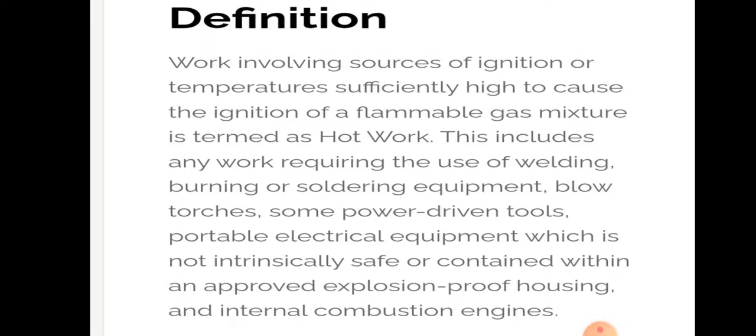This includes any work requiring use of welding, burning or soldering equipment, blow torches, some power driven tools, portable electrical equipment which is not intrinsically safe or contained within an approved explosion proof housing, and an internal combustion engine.

Hot work permit means it is a document issued by a responsible person permitting specific hot work to be done during a particular time interval in a defined area.

SMS should include adequate guidance on the control of hot work and should be robust for compliance to deliver the expectations of ISM code and confirm that it is effective, that stated procedures are being followed.

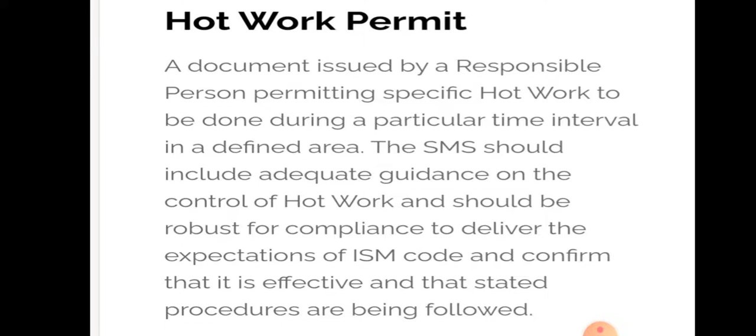Responsibility matter mainly for the master. The master must satisfy himself that hot work is justifiable before granting permission for hot work to be carried out on the ship. It is the master's responsibility to ensure that established procedures for all hot work are implemented and comply fully with company requirements.

If in port, local port or terminal approval is obtained in writing prior to carrying out any work. All flag state regulations are considered.

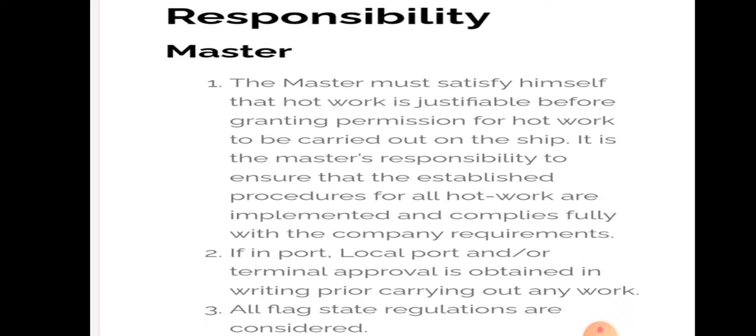You have to ensure that all flag states are considered by doing the hot work permit. Conduct a safety briefing to ensure that control measures are in place, understood, and complied with to the fullest extent.

Prepare a risk assessment with the heads of department to ensure that the environment on board is sufficiently safe for hot work and identify any conflicting operations carried out simultaneously.

Issue the work permit just prior to commencing the work, monitor that all safety controls are maintained throughout, and cancel the permit if conditions are breached or advised by the responsible officer.

The head of department, here the chief officer or chief engineer, should inspect the work area and equipment to be used for hot work together with the persons carrying out the job.

Inspecting the work area and equipment to be used for hot work together with the persons carrying out the job, and physically checking and filling of the work permit jointly with the responsible officer and the person involved in the work.

Testing the atmosphere of the work area where applicable, and ensuring continuous effective ventilation of the work area.

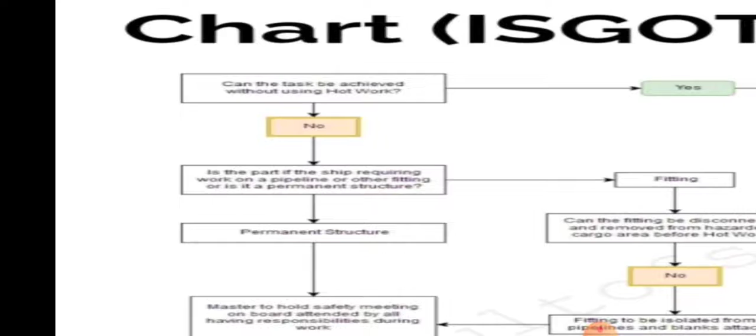Hot work flow chart: here we can say hot work is not permitted if the task can be achieved without using hot work. If yes, hot work is not permitted.

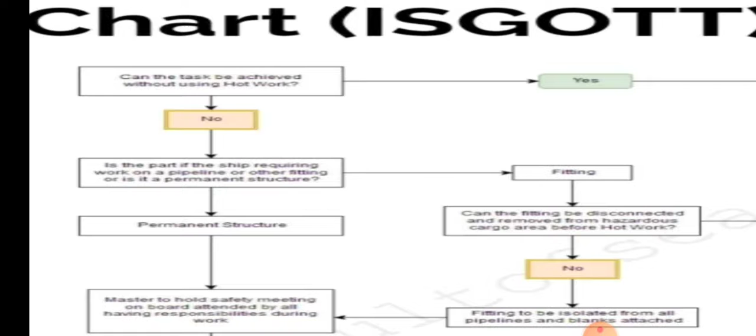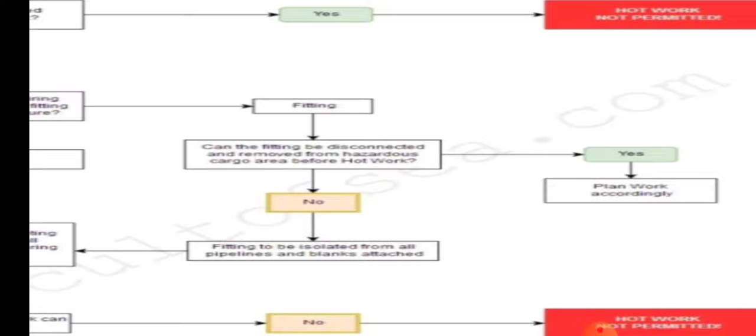If no, we check whether the part of the ship requiring work on the pipeline or fitting is a permanent structure. If it is a fitting, can the fitting be disconnected and removed from the hazardous cargo area before hot work? If yes, plan work accordingly. If no, the fitting is to be isolated from all pipelines and blanks attached.

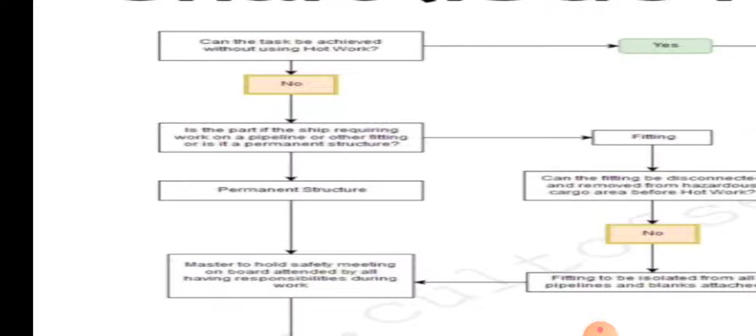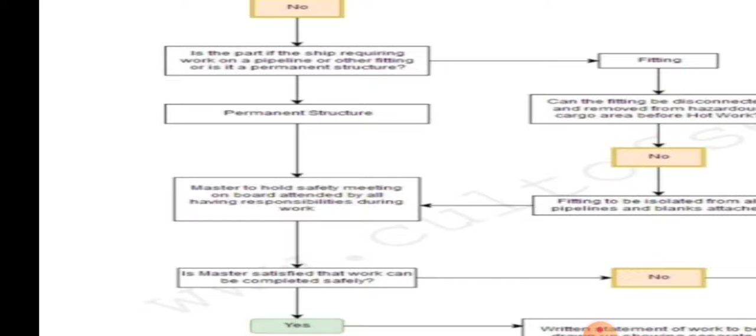If the part of the ship requiring work is a permanent structure, the master must hold a safety meeting on board attended by all having responsibility during the work, and determine whether the work can be completed safely. If no, the hot work permit will not be issued.

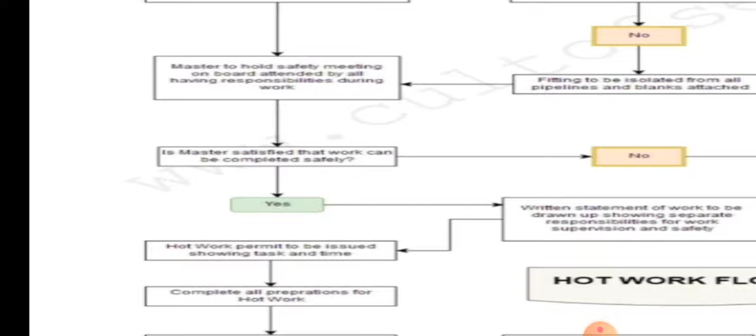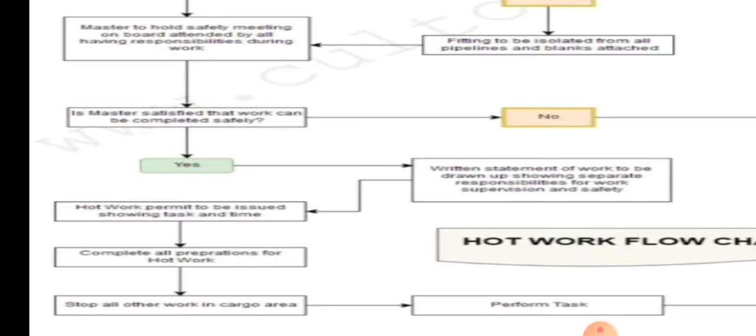If yes, a written statement of work is to be drawn up showing separate responsibility for work, supervision, and safety. The hot work permit is to be issued showing task and time, completion of all preparation for hot work, stopping all other work in the cargo area, performing the task, and recording completion of the operation.

This is how the hot work flow chart works as per ISGOTT.

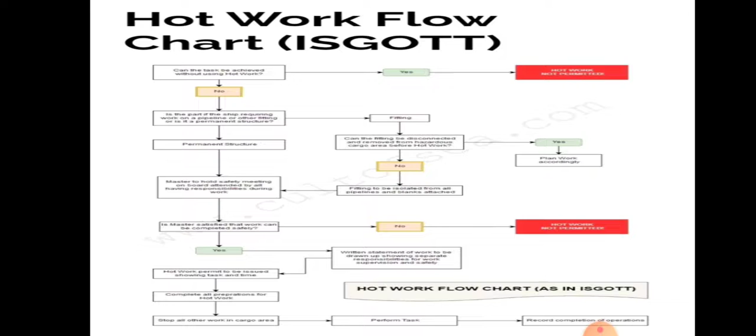Controlling hot work inside a designated space: a designated space for hot work on board is allocated where it is safe to carry out such operations. A permit is not required to be issued, however.

The duty officer on the bridge shall be informed before the start of hot work inside the designated space. Usually, the engine room workshop is considered the designated space.

Hot work outside the designated space means we must prevent unauthorized hot work outside the designated hot work area. Welding extension cables and portable welding machines will be controlled items kept under lock and key in the engine room workshop locker. The master is the only person allowed to approve any hot work outside the designated hot work area, with prior approval from the company.

We have to ensure that outside the designated hot work area is properly controlled. Inside the designated hot work area, mainly the engine room, the chief engineer can allow the permit after informing the master. But outside the designated area, it is the master himself who is the designated person to give the hot work permit.

Then the hot work process: the work area shall be carefully prepared, isolated, and cleaned before hot work commences.

Fire safety precautions and fire extinguishing measures shall be reviewed, and adequate firefighting equipment must be prepared, laid out and ready for immediate use.

Fire watch procedures must be established for the area of hot work and for adjacent spaces where transfer of heat or accident damage might create a hazard, for example damage to hydraulic lines, electrical cables, thermal oil lines, etc.

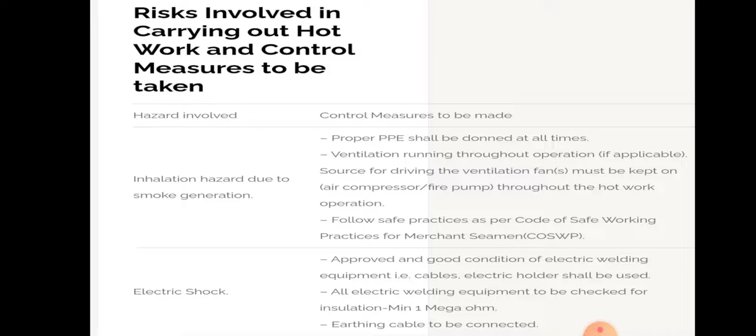For eye injury hazard, welding mask and safety goggles are to be used. All persons involved in the operation shall wear safety glasses.

Falling from height or slipping and tripping, depending upon location of work: proper personal protective equipment should be worn at all times. Adequate non-skid shoes are to be worn, the area should be clear of any slipping hazard, and a safety harness shall be used wherever applicable.

Working aloft, a checklist is to be completed to avoid any crucial points being missed. Personal injury by falling objects is another risk to consider.

While lowering any object, a safety line or bucket is to be used. All equipment and ropes used for the job shall be thoroughly inspected. Prior to lowering any object, ensure that all passage spaces are clear underneath.

For burns and scalds due to contact with hot surfaces, proper personal protective equipment should be worn at all times. Personnel involved in the hot work are to exercise utmost care to ensure no contact is made with hot surfaces.

For fire and explosion hazard, a fire watch shall be posted and firefighting equipment kept ready for immediate use in the vicinity. All elements of the hot work permit shall be followed prior to commencement of hot work, and a gas check is to be carried out to ensure the space is free of any combustible material.

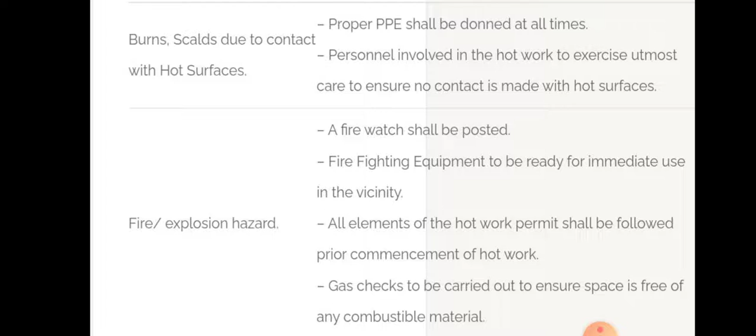So this is what happens with fire and explosion hazard and all. Thank you.